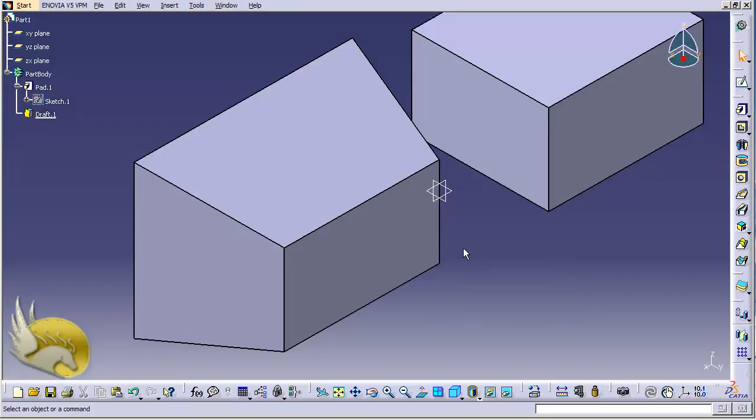Now if I want to remove material from my shape, I can do two things. I double click on draft tool, and you can see a little arrow here. By clicking this to change the direction, you can see that I'm actually removing material from my shape.

Or you can keep this outward but assign negative degrees to your shape. By assigning negative degrees, again you're removing from your material here. Now I'm going to press Ctrl Z several times to remove this draft, and now you can see that my padding is the only feature that is available.

I'm going to go to insert menu, dress up features, and select draft again. This time I'm going to select the faces to draft manually. I'm not going to select every face, just this face and this face. The degree is going to be about 25 degrees, and the neutral element is going to be this.

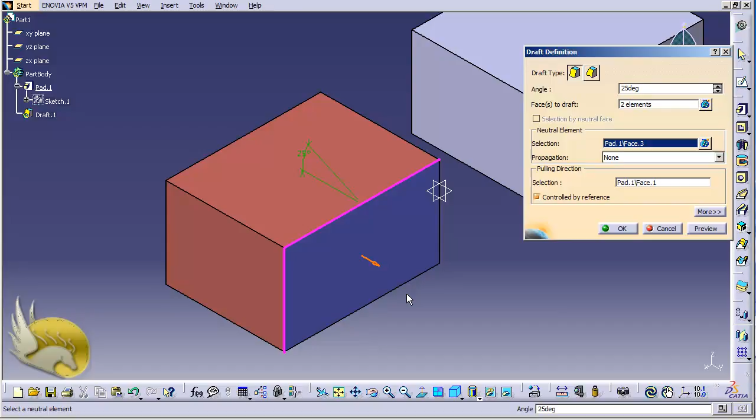Now be careful about the selection of neutral face. If you select a face that is going to change, it will give you an error message. So I'm going to have this instead, and now I click on OK, and this is the result that I have. The next thing I want to show you is the shell feature.

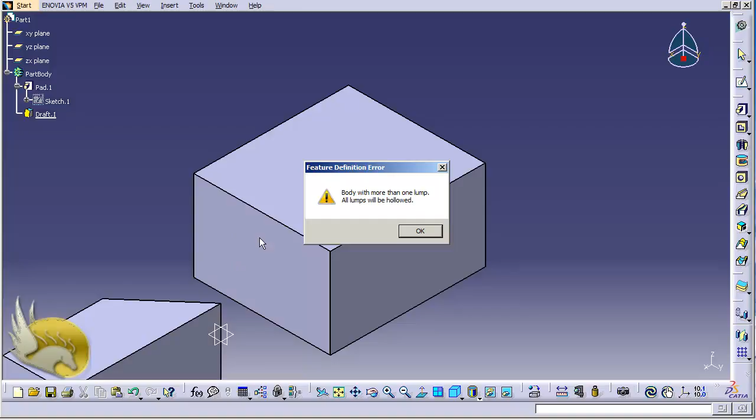I pan to the left a little bit, and now I go to insert menu, dress up features, and select shell tool. Shell will remove from your shape. So it tells me that the body will have more than one lump, because I have two shapes in one padding, so it gives me this error.

So I click OK. That's okay for me because I'm going to work with one of the lumps here. This is going to be a mess, of course, and I'm going to assign the thickness of the walls after removing some of this lump, as CATIA refers to that.

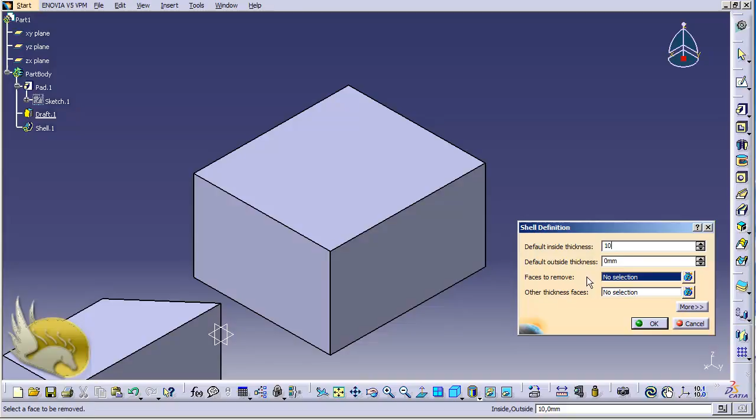So I actually want the walls of this shape to be about 10 millimeters. The face to remove is going to be this face, so I'm going to have a box, an empty box shape, after removing some of the mass. I click on OK, and you can see this is the result that you have.

Every wall and the floor has a thickness of 10 millimeters, and the thickness is part of the material. It has not added to material, it has just removed from material.

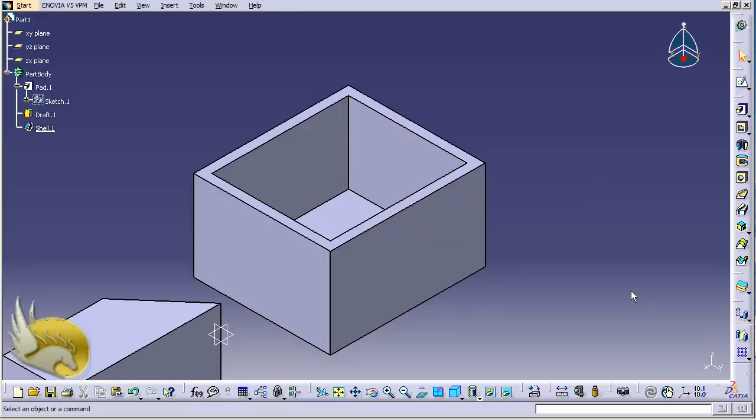So if I double click on shell again, I want to show you that you can actually add to your material. If you have outside thickness, for example, I want to add about 20 millimeters of thickness to my shape. This outside thickness is the material that is going to be added to your shape. So I click on OK.

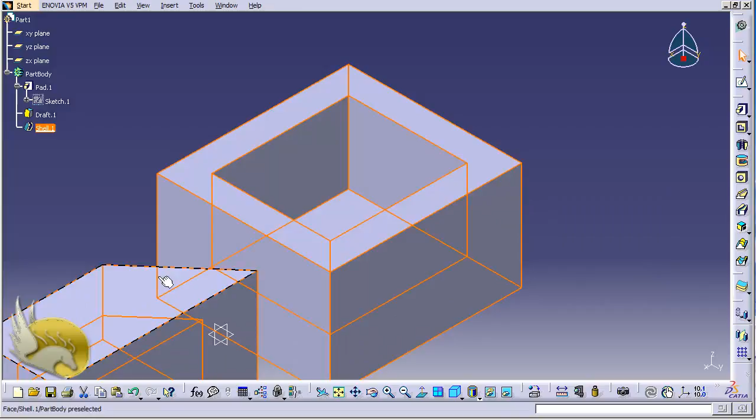Now I can see that 10 millimeters of the shape is for itself because I have 10 millimeters of inside thickness, and 20 millimeters is added to my shape, and that's actually the material that is added. So in some cases you might not want to add material because the dimensions will change, or it might interfere with other objects in your shape, but this is the result you can receive from your addition.

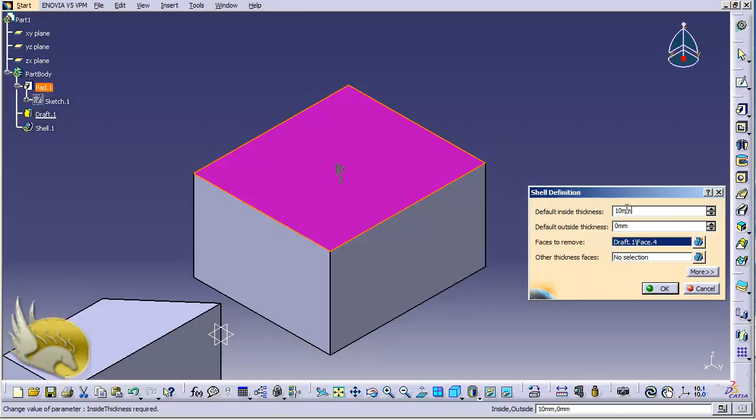So I double click on shell, and now I want to make this about 0 again. Outside thickness is not going to have any value, but I can assign different thicknesses to different walls of my shape. For example, this is the default thickness that every wall I have not assigned a value will get. But I'm going to go to other thickness faces, click on this, and click on this.

Now I have two different faces with two different values to change. I double click on this constraint and make this about 20 millimeters. I want to have 20 millimeters on this wall. I go to this constraint, double click on this again, and make this about 25 millimeters.

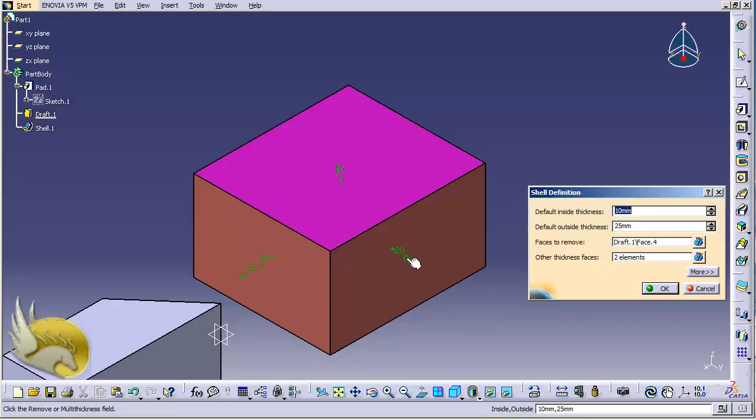So every other wall has 10 millimeters, but these two walls that I have selected in other thickness faces will have their own amount of thickness. I click on OK, and this is the result that you receive from this tool. So now you know how to add or remove materials using these two features. These are very nice tools to work with, and now it's up to you to work with them.